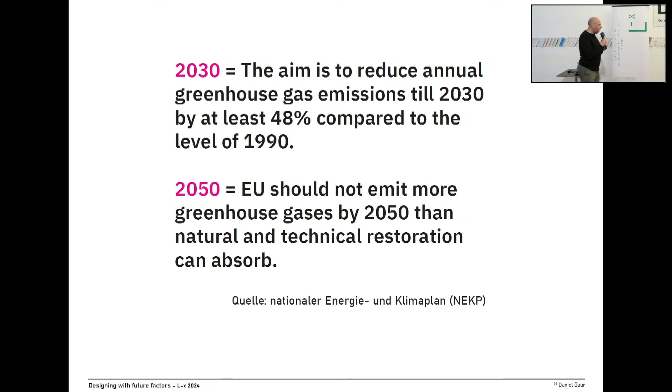And even less do we understand the goal we have for 2050. That's something—when we formulate goals and have no idea what we do, then we definitely should change something. We can change the goals, or we can get on the path to figure out what we really have to do and where there's an impact we can really solve, or adjust the goals.

The first way, I try to figure out what's the cultural background, why we don't understand what we have to do. And I found it in the culture of building. We all love to build, don't we? Yeah, we love it.

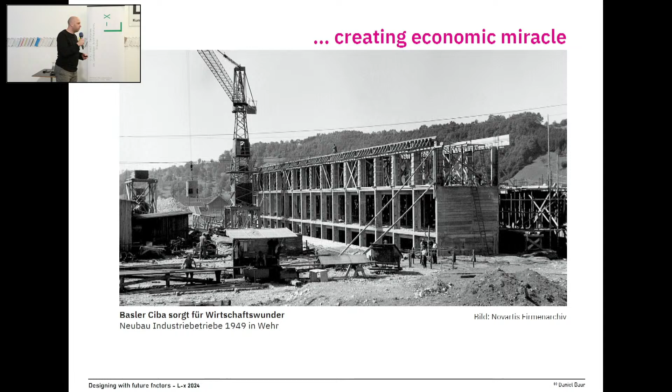The next thing, some years later, after the war our culture had nothing—no money, no food. Then we realized, and this is an image from Basel, the pharma concerns built up industrial sites, and we learned that when we build huge buildings, that generates work, and because we can work there, we can get an economical miracle. We could raise our prosperity. So we learned that building helps us get somewhere.

And this is also happening in Switzerland, not just Vienna. I read in the newspaper in Zug that when we build many housing, we can solve all the issues of people needing apartments. At the end of the article, the journalist said, yeah, probably it's not really equality, but we could solve this problem by building solutions.

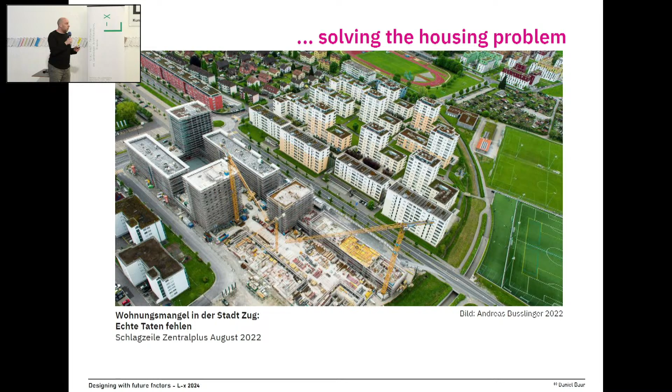This is our culture, this is where we're coming from, and all the universities are built out of this thought. And even more a problem—I guess you have pensions too—because many pensions invest in buildings. So we actually save our prosperity in old age by building buildings.

So we need those. In Switzerland, more than a third of pension money is saved through building, and they have to build every year so they can keep the safety for the old people's money.

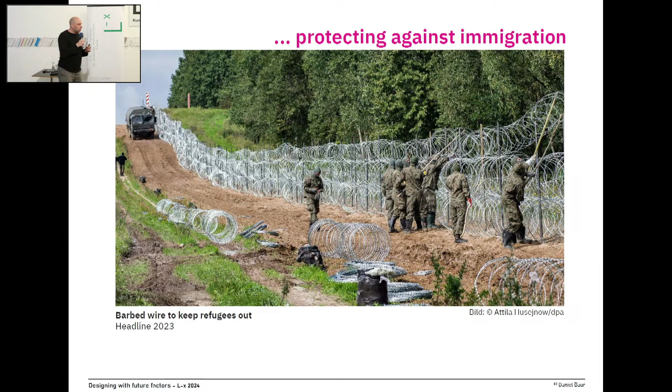And then we learned last year that when you build barbed wires along the borders, you can solve the issue with immigrants. Mr. Trump said this too. You still believe it? It really shows that we have no other solutions, or it's hard for us to find solutions other than to build things.

And brings it somewhere—don't ask me where, to the sea or somewhere. So we've learned that we don't have to change things. We just build this direct air machine, and then everything is good.

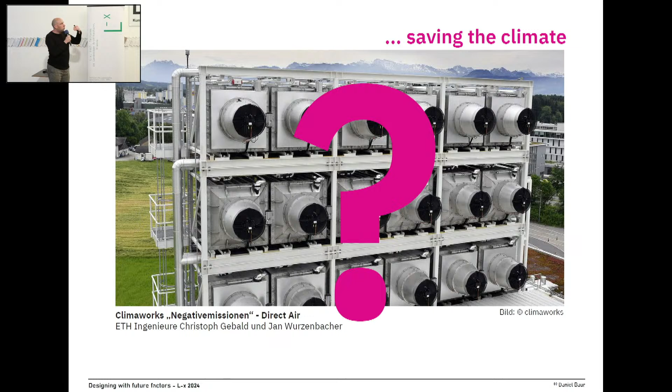We have a cultural problem. We don't have a problem that we don't know how to do it. We have a problem that our way of finding a solution is by building things, and now we learn that building doesn't lead to anything good—it leads to a problem. So we've learned that building causes problems.

And what that means is the big issue. We feel enabled—when we have a problem and we can do things, we feel enabled to react. So what I learned from this is that we need to find solutions for society, not just for building things. We need to see it holistically, not just by designing with a new label where everything looks shabby chic with reuse. I really hate shabby chic, sorry. Shabby chic is not cool.

Because we have a culture of aesthetics. This is part of architecture, this is part of our talents. And I think we need to see the whole process.

And this leads me to the question: what's the challenge? I guess most of you work in an office or are studying architecture or landscape architecture. Sorry, it's going to be dry, really dry, for about two minutes, but it's important to talk about this.

Let me talk about the level of sustainability and how buildings can really be helpful for what we need to do. The lowest level is the method of efficiency, the design methods. I talk about design methods because this is the base of our work. We often forget that we don't just build buildings, we actually design the design process—this is the first thing we do. And what we realize is that many architects and landscape architects are still stuck in the thinking of efficiency and the method of building.

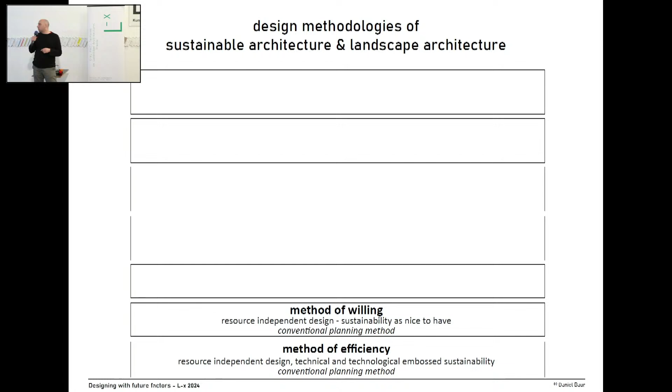The next level is these label things. Who knows all the labels? Who likes labels? You're very welcome. I don't like labels, because labels give us the feeling that what we're doing is good. But if you look at where these labels come from, they're from the industry that's actually doing all this construction. So it's a legitimation of what we are doing. I don't say it's wrong, I just say it's probably not enough.

And now we're in the situation that reuse becomes like modern—we think it's cool to reuse a door, or even worse, a window. It's the worst thing you can reuse, actually, the windows.

It really doesn't make any sense, but I will talk later on about this. When we rise up and say, okay, when we really want to work sustainably in our profession, we need to work in these cycles. This is not that easy, and I will show some projects we did with this thought of circularity.

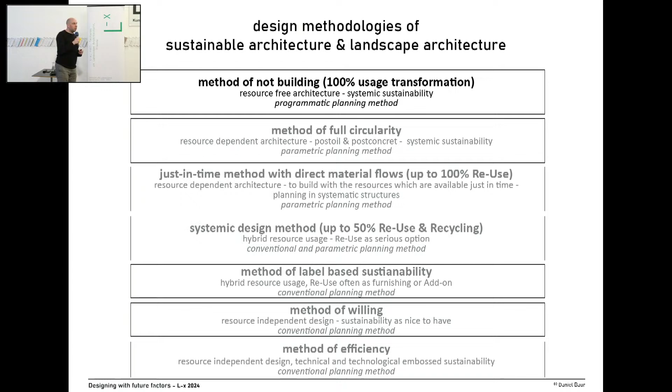The heaven of sustainability is the architecture of non-building, and I have no idea how that should work, because I'm not really a fan to say that we should stop building things. We need the possibility to react to the questions of our society, and that needs the situation that we can change things. So I'm from the side that I think we need design methods that can work in circularity and that we still can do our job in a way that we have a future ability.

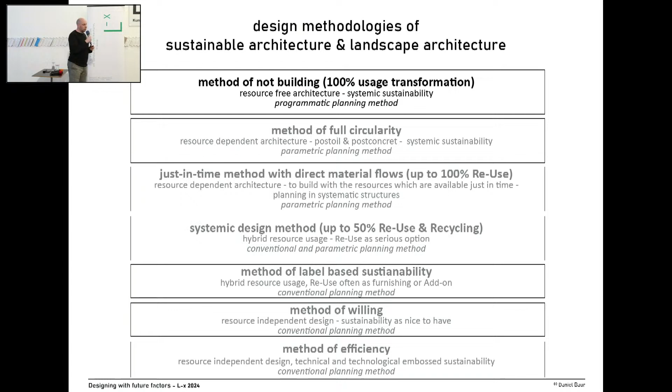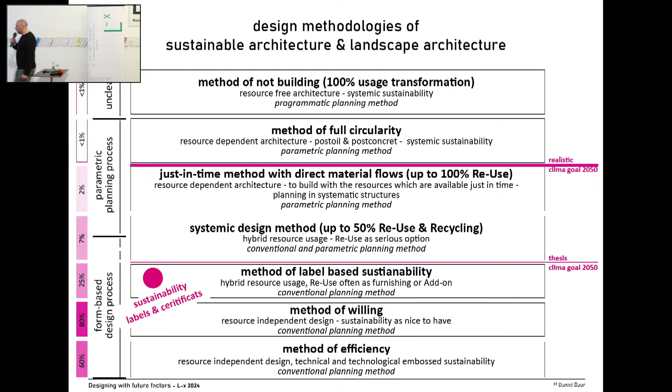From the research-wise, we see that the goals we heard in the beginning, when you do the method of labeling, we're going to be good, we can reach the goals. But the research society says actually we can reach the goals only when we are up there. Interesting is that most of the architects and planning offices are actually here, and that causes the situation that I found. I'm interested in that part, at the university and also at our office, to figure out how we can build in this circularity.

This means resource-based designing. And I bring you now to the project.

You survived the driving, is still okay? You didn't sleep? Not yet.

Okay, you're still okay. So I want to talk about Campus Primeo. Campus Primeo is an energy supplier, and they changed the brand from EBM, which is not that sexy, to Primeo Energie, which is the Primeo. This is the headquarter, you can see. And somehow they asked us to be part of the designing team who brings this industrial site to a headquarter feeling.

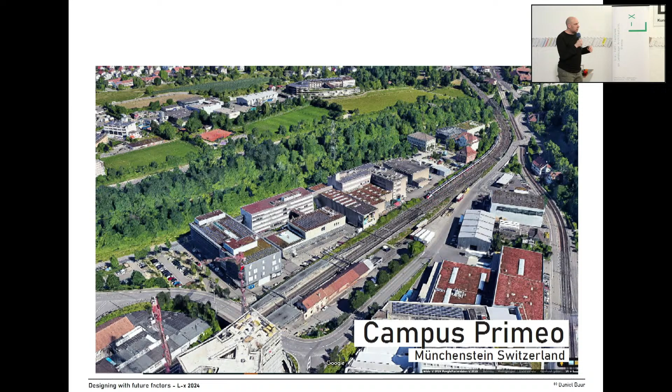The first thing I read is what they wrote about their sustainability. And they found all the great words, really: reuse, recycle, repair, decarbonation. Really, I don't know, probably AI, they spilled out the words they need so everybody thinks they're sustainable. And we as a team said, okay, we're going to do it that way. And they were quite happy, they found this cool.

And a half a year later, there was another feeling, and I will tell you why. This is kind of how this site looked like: a lot of asphalt. We had to support 40 ton trucks going there. It's really an industrial site, so it has to fit the conditions of an industrial site.

The first thing we did, in a meeting when we started the project, we said, look at these, these are the values we follow. We said we want to have a climate positive design. We just work with reused elements, 100% also the foundation. We use material appropriate to their life cycle. This sounds also cool: using material that is available at the moment of construction. Okay, no fun anymore: sponge city principle and waste-free construction site. This is the funniest one.

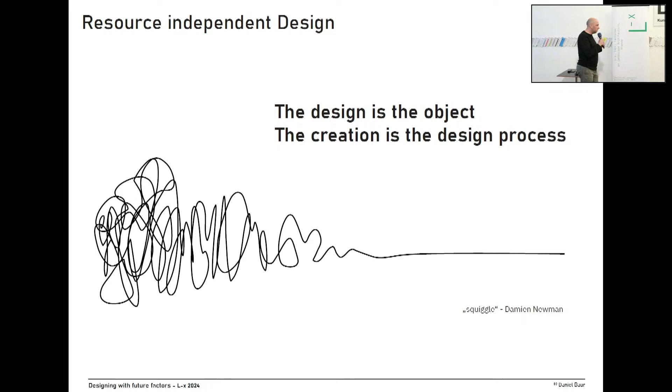So when we design resource independent, the design is the object and the creation is the design process. This is important to understand, because when you design resource dependent, the resource is the limitation of what you can do. So you're actually designing the rules of how the resources come together, because you don't know the resources in the moment where you're planning—you are not designing the objects. So the design becomes the parameters that lead to the objects, not the objects themselves.

Are you still with me? Yeah, good. So the creation is the linked system.

The interesting thing was also, how can you get the permission for this project? How do you think? We go to the permit department and say, probably it's like this—it could be gravel, it could be also slabs, we don't know. The drainage, probably it's a linear drainage, probably it's punctual, we don't know yet. We don't know the material right now, but we need the permission, otherwise we can't get on. All these questions we had to solve while in the process with the departments for permission, to figure out how we can save quality.

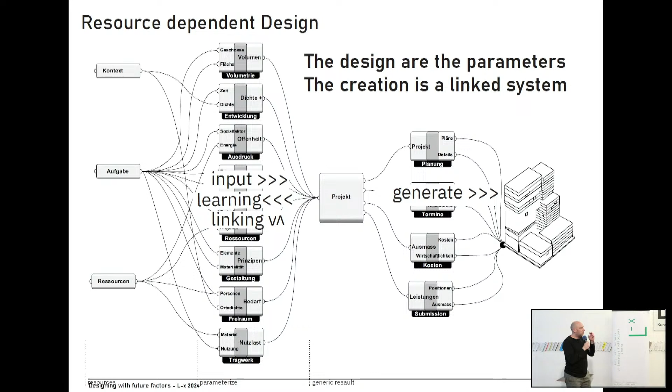This project actually started with the question of how to set up rules. In the beginning, we didn't design the plaza—we designed the rules and simulated it. This was very important for us to understand the aesthetic. It's not just shabby chic, arranged—we created rules that could work with the conditions of unknown things. We didn't know how many stones we had, we didn't know which kind of stones, so we set up rules. I can show you this on this plan.

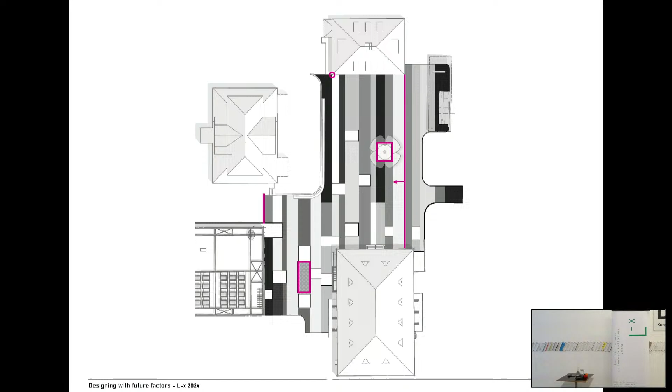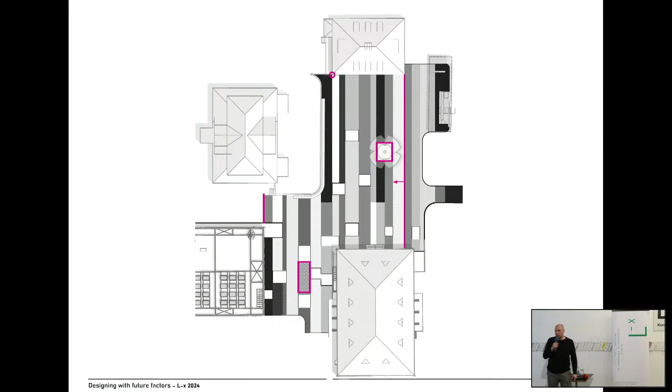This was the little plaza, and we decided that one rule is that we think in linear lines. Why do we think in lines? Because it was helpful, an easier way to figure things out if you have just one dimension to go with different types of materials and amounts of material. We said we always want to use everything—when we get 200 square meters of stones, we take 200 square meters, we don't take 150 just to fit our design. We take everything, otherwise we have waste again. So we said: no waste on construction.

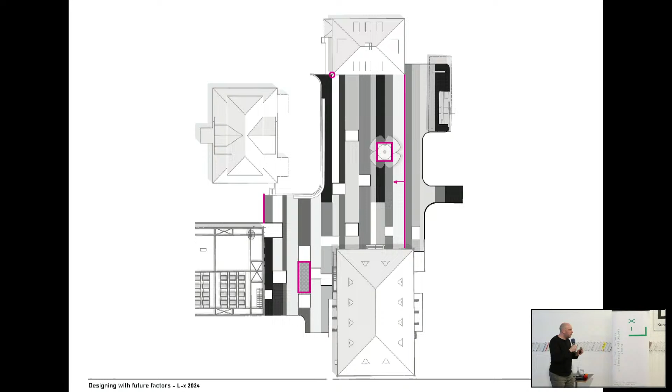So we had to figure out which parameters are fixed and which parameters can grow. We defined how it grows, and also with the trees—what we're doing when material fits to each other—so the trees become like an in-between situation, a buffer.

So we started to design things, and this was also interesting with the construction company, because when they started we said, we start with these rules and we have to work together, because in the end the plan looks totally different. So the first material came, and our construction manager was quite screwed up, because he had to work totally differently. Usually you plan and you're controlling, you're a manager. But when you work with resource-based design, this is teamwork.

What we learned is that it's a great experience to work with these people from construction on the same eye level, because when they had to find gravel for the foundation, they walked through the area, looked at other construction sites and their dumpers, and said, this dumper comes to my construction. They had to go there and look at the material together with the foreman and the construction manager to find where's the right material. This creates a totally different symbiosis of working, so the designers and the construction become one. And the quality was great.

Because the people from the construction side, they wanted to show that they can do it well. And we were not anymore the controllers, we were the team partners. This was a really nice experience.

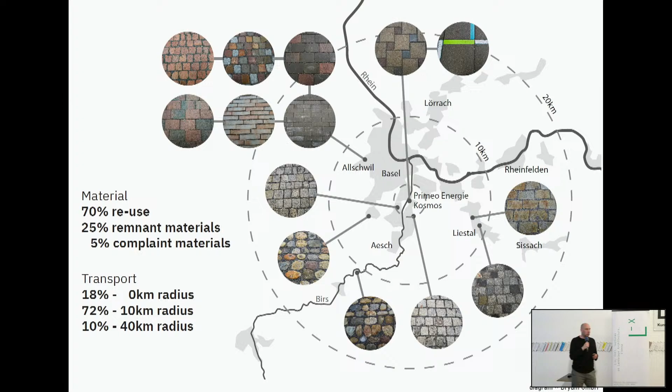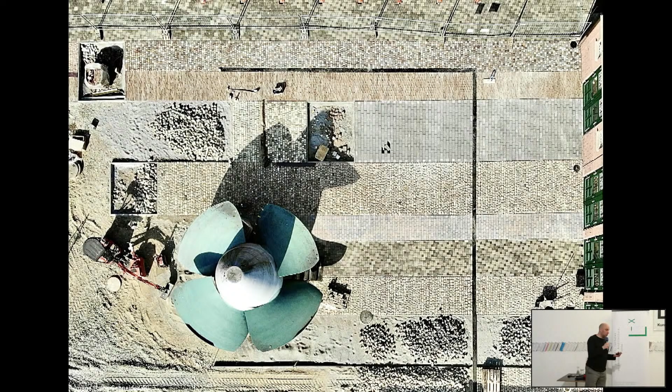So I'm going to show you the images, and I think it's important to talk later about whether this is good quality or aesthetically pleasing, or just a bunch of material put together. I think this is an important discussion.

You can see here the rules - it's done really by line, and always with no waste. And also, the trees are not reused.

Actually, this was also funny. This was an old parking lot.

It was also funny to see that the construction managers, who are usually not the designers, came to a high level of performance by designing, because they found - this is, and now I'm also part of the design process, and it's really this way. You become part of the design process on construction. I think this is an interesting thought, also for people who really want to be involved in the whole process.

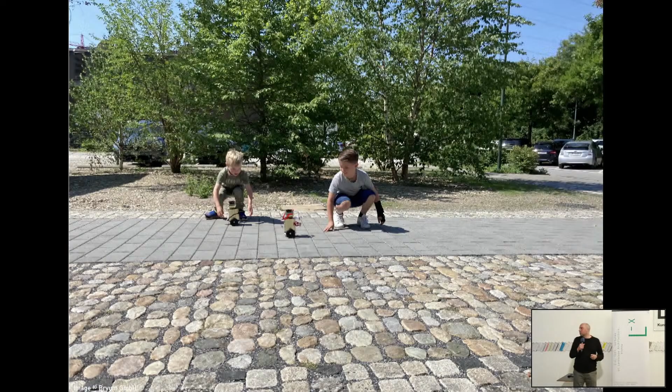And what's also funny is that this plaza becomes very lively, because even though the site is huge, the scale becomes lively because people like to be there. It's a slow scale, and the materials are different. Somehow they really liked it.

I think today I wouldn't do it the same way, but it was the first construction we did this way. I'm glad to talk later about this, because the mixture is probably too much. Somehow people like it, but we have to go further.

So when we published this, everybody was saying, on landscape it's easy, it's 2D, landscape is flat. And because I'm split between teaching architecture and having a landscape architecture office, I said we need to invent this also for architecture, and figure out how this process also works for architecture.

I want to show how we do it, and some results about reuse in architecture. So it all began with this concern in Basel who wanted to demolish a huge amount of buildings. They studied whether they could reuse or transform it, and figured out it's somehow about the structural system - it's not possible with the existing construction and structure. I was part of the discussion, and I said that's perfect to figure out how we can bring these buildings back to circularity.

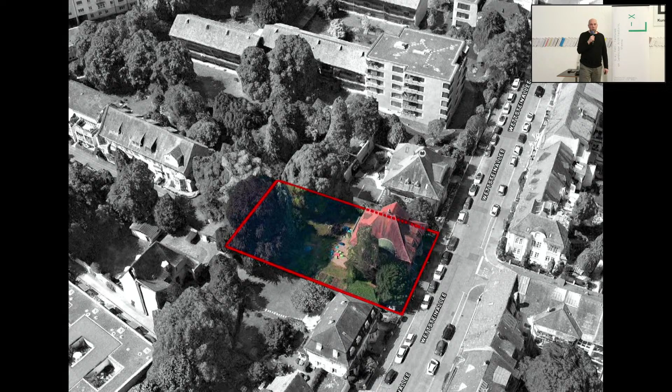And we started by looking for different ideas where we could intervene in the neighborhood. We found some partners who were interested that we could test this with students. And we came up with a thesis.

In the beginning, they came up and said, we're doing a catalog with everything - the floors, the doors - and you can go shopping like it's a mall. And we said, forget it - when you want to get rid of this building, you'd need years to bring everything back to circularity. So as a university, we said you need to create construction sets out of it - not just individual pieces, but create, out of these buildings, 7 kindergartens and housing units, where people take the whole house or the whole kindergarten. Otherwise, you can't solve this problem with such huge buildings.

Roche said they are totally with us and they want to check this, and then we set up rules. And I think these are very important rules when you work in a resource-dependent designing process.

The first thing is that when you use material, you should use it in the same function again. That's the best way you can use it. The second thing is that you shouldn't adapt things, so no waste. We don't want to cut things. If you have a steel bar, use it as it is. The only thing you can do is a structural addition when you need a flange to bring it together.

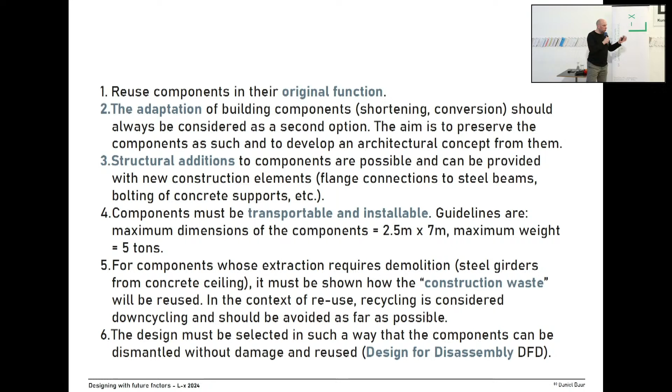So the organization that you need for a research designing studio like this requires a lot of people. We had this great situation, and I can really say, I think every university should work more with private people.

So we found engineers, they were part of our studio. They came, they did coachings, they brought their knowledge. We had companies like Erne, people who actually do things like demolition. And with this huge team, we could do research and education at the same time. This was really helpful, and we still do it that way.

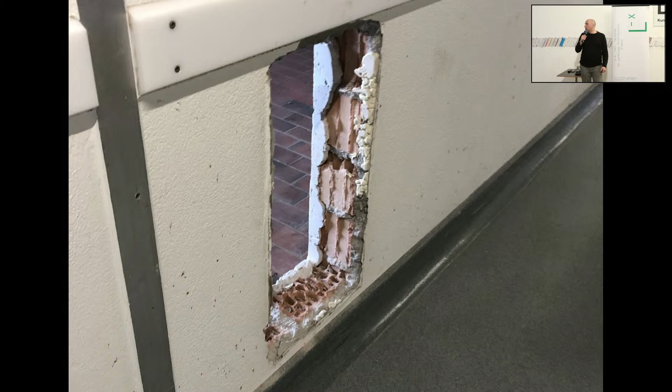And the resource, we were there with the students, and we looked at all the buildings, and all the material, and all the layers of a building, and of course also the architecture.

Because often when I hear about reuse, I don't feel that people really think also about the design and the aesthetics. They just talk about bricolage. And this is not really what futurability means with reuse.

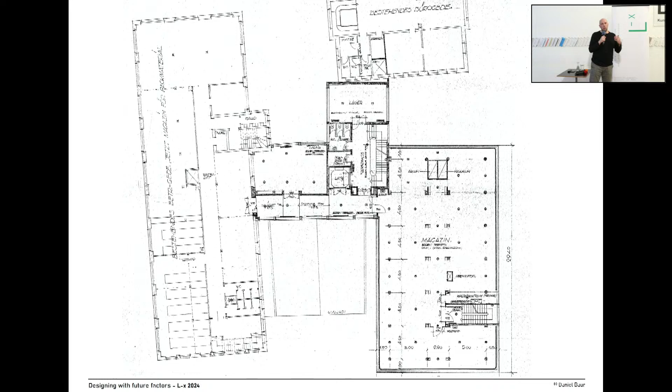So the students really get into the building, try to understand why things are the way they are, and what's the future of the elements. And Roche, they were already at the stage that they had a catalog with all the elements, and this is easy.

And our research team, they said, you know, often we don't have this catalog already. And we found a way, I just want to tell you this, that you can also use Matterport. You know this Matterport? No? This is an easy way how you can create your own street view for a building, for example.

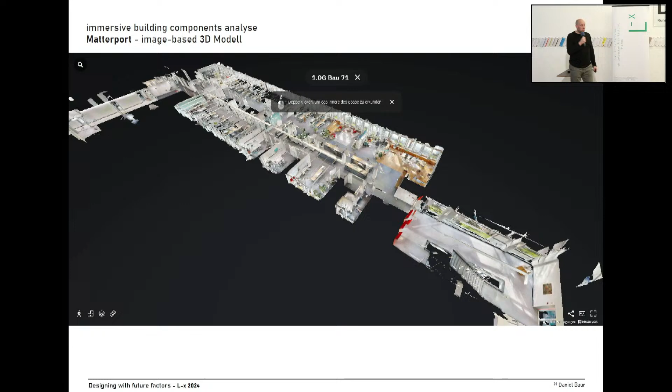So to scan this building, two students took an afternoon. They walked through this building with a camera, and this camera is so precise that it captures the whole thing by image in 3D. And the cool thing is, it's really stupidly easy. Even I can do it.

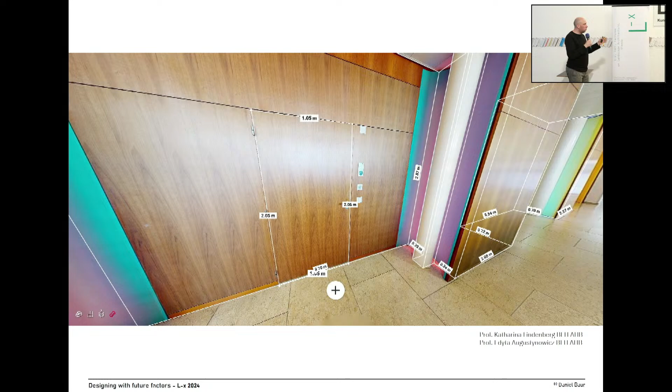So that you can measure it afterward on the internet. You put these 3D models online and you can go and measure things. So you don't have to create a catalog in the beginning. You really can just take it from the visual situation, and then you can see it's very precise - it's 1 meter 05 - and you can measure. Everybody can measure later on what the elements are, and this is important.

Then, when we talk about design method, it's all about learning. Resource-based designing is all about learning. So two-thirds of the process, you don't work on a project, you don't work on what you want to see in the end. You're learning. And in the beginning you learn about the elements, which kind of elements you have, and what phenomena you can create out of these elements.

We talk about the structure, possibility, and the programming, because structure and programming is also connected. This is in landscape as well, in the architecture that way. And then on the end, you talk about the solids. How can you feel solids? And this is on the end a system that comes together.

And in the last third time, you're generating actually your project out of the parameters. So the designing is actually really in this phase and not in the generating phase.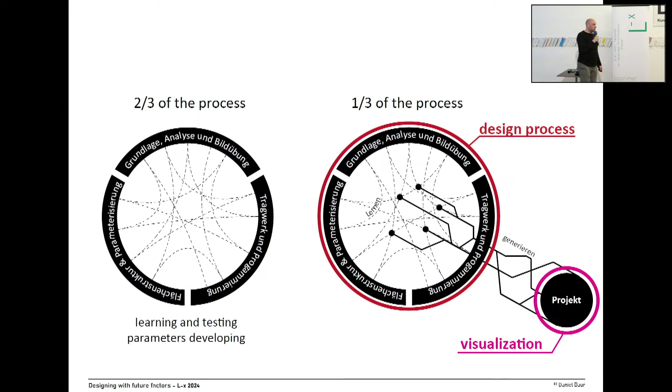So in the first thing, as I said, we designed with the students' parameters and created out of these parameters spaces. We checked out the aesthetics of the quality of spaces. We checked out the room program, can they fit in? In the second phase, we checked how these solids fit to this structure, and we had to learn also that some structures had to be changed.

So this is a very iterative process. It's not really - if you have already in phase 1 an idea of the final building, you're screwed up with the second phase. So you have to be very iterative and to learn things. And this is something students in the beginning struggled with, because they want to create a product and not to create a learning curve.

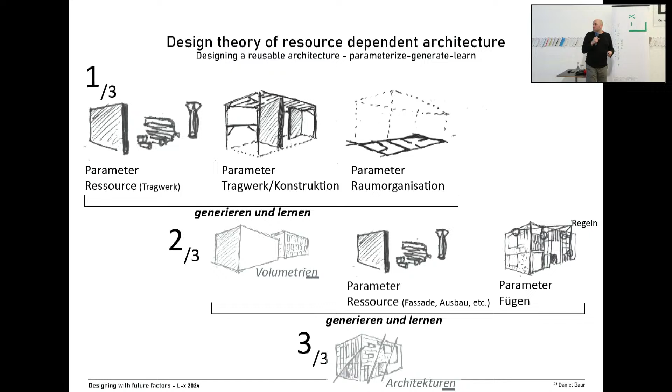I want to show you, before I go back to landscape, some projects to show also that this has nothing to do with shabby chic. The project from Rebecca Bernhardt, I show really the process. We gave them the task that in the beginning they should create, out of images they took, an atmospheric translation to the work they have to do, to the project what they have to do. So it was an industrial site, and they had to invent 2-story buildings for living.

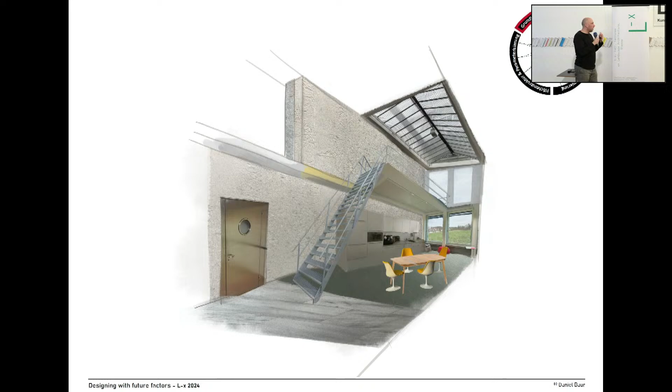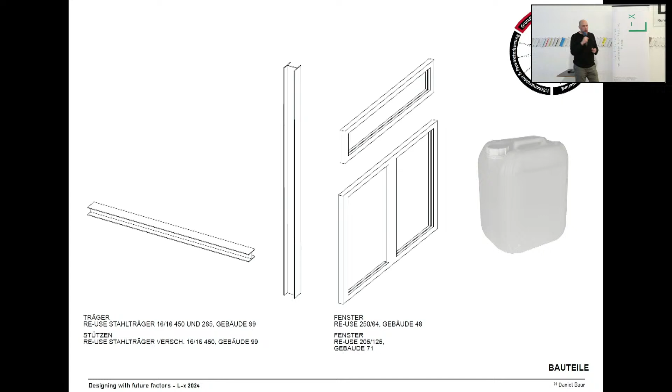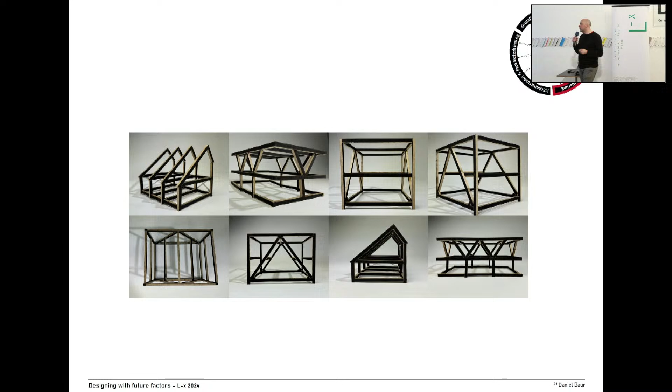So she started to figure out what's the atmosphere of the material. The first thing was not a technical question. It was really how can we get design, how we get atmospheric with this material. This is very important. The second thing she started to learn was that she decided which kind of material she would want to use for structure, and she started with this material, and she did learnings. She looked at when you fit these elements together, what kind of different spaces you can generate, and what are the aesthetics and the quality of these spaces.

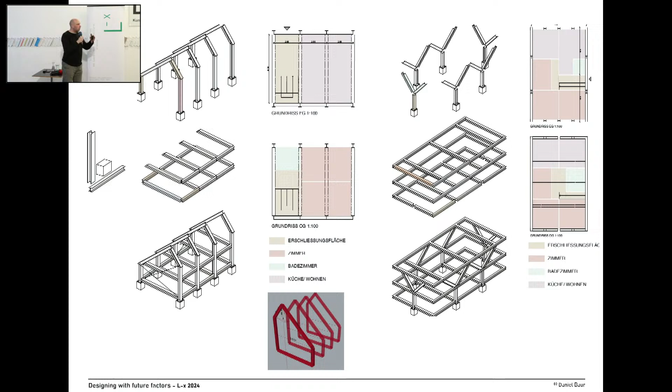Then she set up rules. She figured out which kind of structure gives her the space to react later on, and she created a huge learning curve and figured out on the end what kind of structure would be resistant. And then she started to figure out which kind of solid with its dimensions could work with it, and the whole process was really just learning.

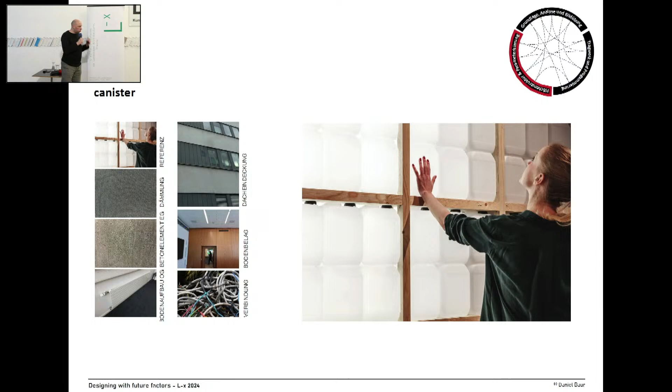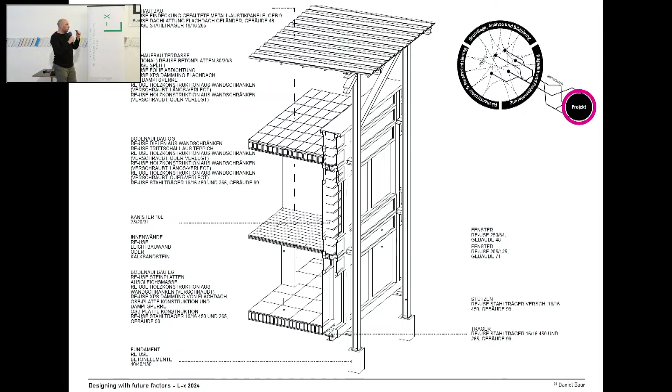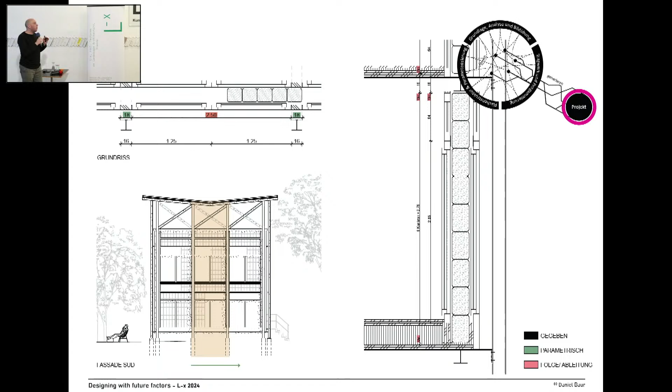With canisters, with pet grids, she did many different things. And on the end, she generated a building out of it, which works exactly with the beams they had in the right length, with the window dimensions. And as you can see, the whole design is based on the resource she had. And I was quite happy to see this, because out of the design process there were really interesting phenomena of space she would never have had if she would just design by herself.

What was also interesting, the engineers, the external experts, they counted what this means. Usually, as I said, I'm not that much interested in numbers, but it was interesting. They really checked the project from Rebecca in a way - is it really working structural-wise? Is it engineering working? It's not just a student idea of working.

And how much carbon dioxide it's expended by square meter Energiebezugsfläche per year. And you can see, if she would do this project with new elements, it's around 16.18 kilograms carbon dioxide. And because she worked with reuse, it's almost a third of that. And when we think back to the question in the beginning, what does this mean for 2030 - half of the emissions from 1990 - then we get some solution that when we change the design process, we are able to reach these goals.

This was something we really learned, that we need to change not what we are building, we need to change the way how we design it.

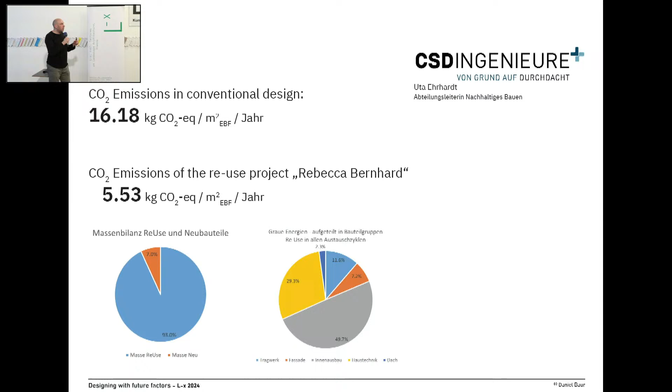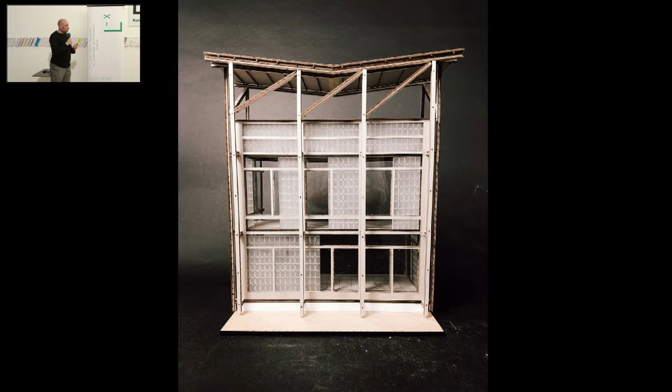I really like this project because it shows architecture, it's not just bricolage. I'll flip through other projects without explaining too much, just to show that changing design projects brings back architecture quality, aesthetic quality, and not just a new sustainable object.

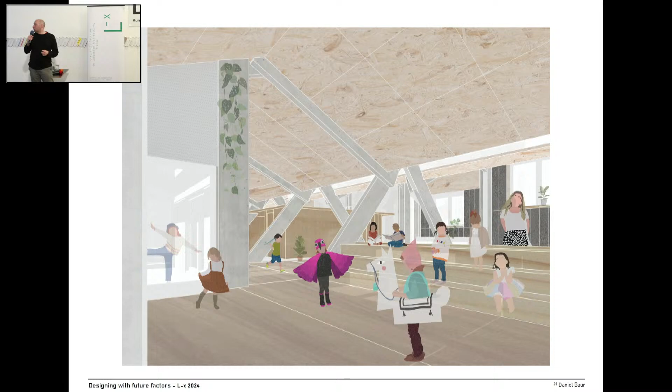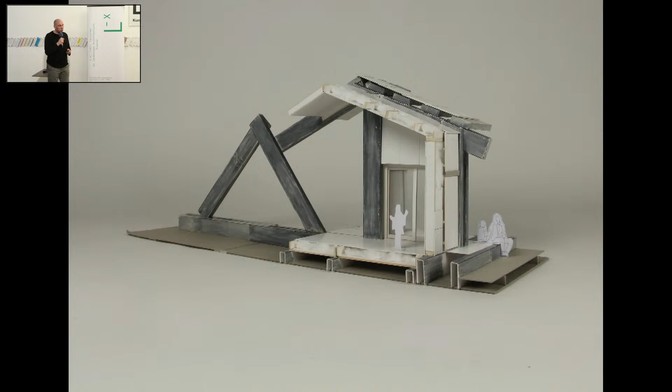She actually worked with construction of concrete, using concrete situations because in Switzerland 70% of built buildings are concrete, so we need solutions for concrete. She found structural solutions for how to use these beams, and had to design a kindergarten. The space became very interesting for kids, especially at their eye level. This resource-based design led her to a very special way of activating or creating space for kids, and it worked 100% with reused material.

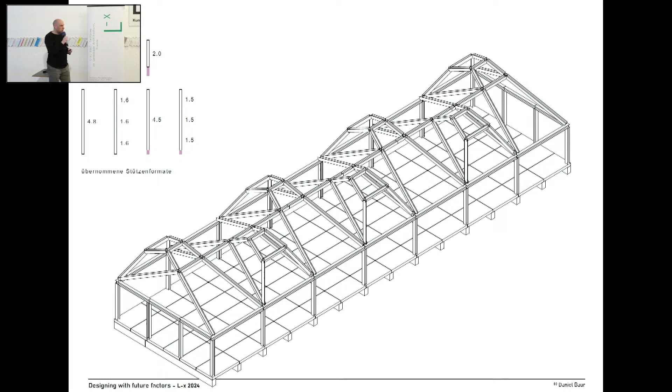Celio also had to design a kindergarten, and he tried to figure out good structural rules. He found a difficult one, but it worked without changing the elements, creating a two-story kindergarten which I really like. The kindergarten professionals at our last review loved these designs because they felt it had a really nice atmosphere.

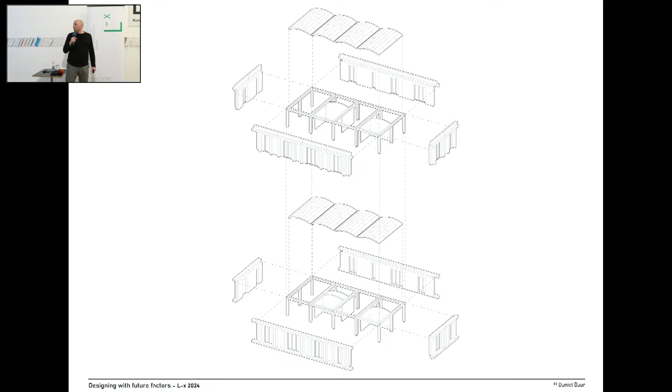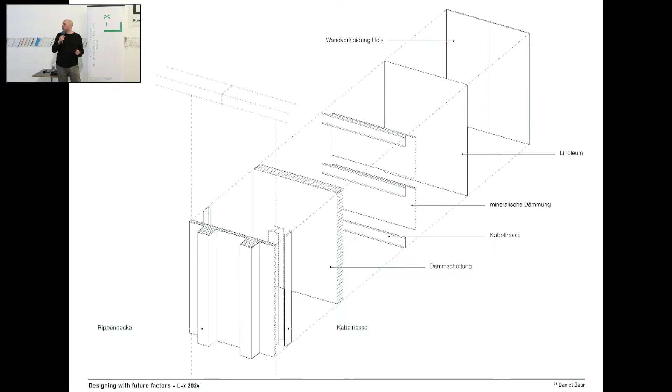The last project was very technical. He used slabs and ceilings to create a whole building out of concrete, 100% reused, including insulation and wind paper, everything 100% reuse. This project fits very well to the situation it needs to be placed in, and it's a house for living.

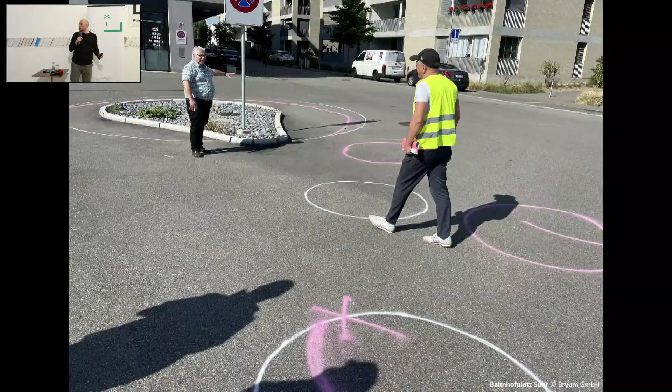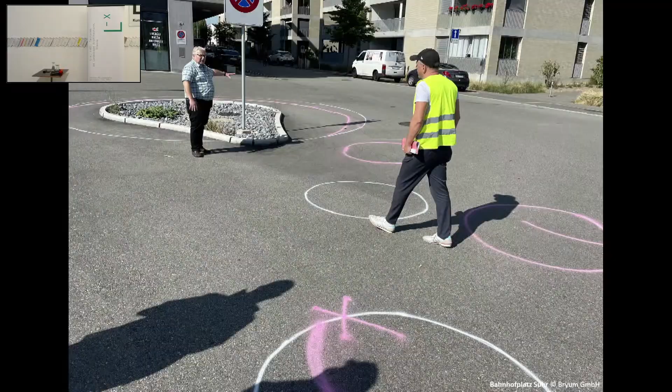It's somehow, that was not me. Somebody wants to go to... I'll just go back. Are you done? You want to go to Apero, I guess, huh? No, okay, so next project.

It's a landscape project. At the beginning everybody said it was interesting, this plaza is small, almost an art piece. We have a contract with the city of Bern to build a new city access, quite a long and important one. We proposed doing it 100% reuse, and it's important this access has quality because many people will use it. There are many functions: firefighters, police, tons of people, bikes, and it needs to be barrier-free. So it's quite a huge amount of things we need to solve.

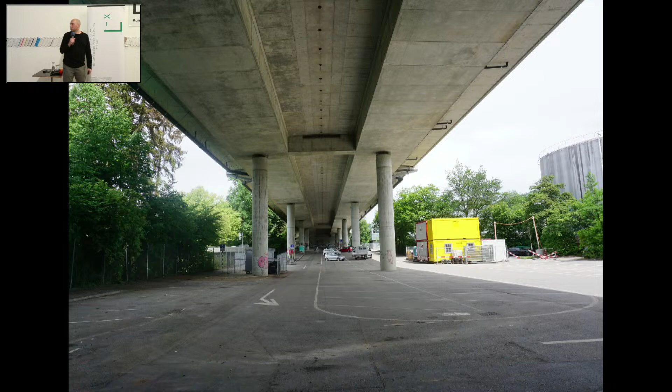This is the space as it looks today, basically a street and parking lot. The master planning says the left and right sides of this bridge will become a huge amount of housing, more than a thousand apartments. It's a huge dimension of development, and this axis underneath the bridge becomes the new city axis of Bern. So that's the vision.

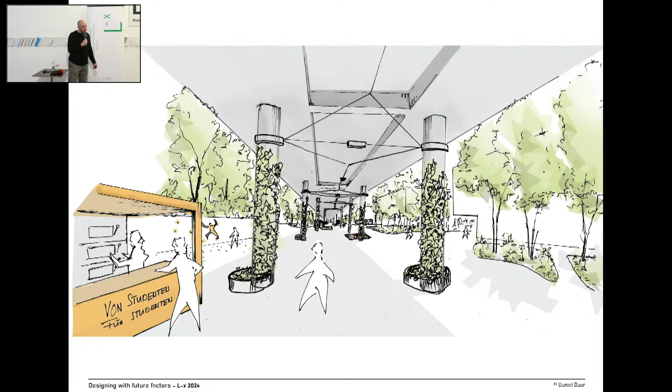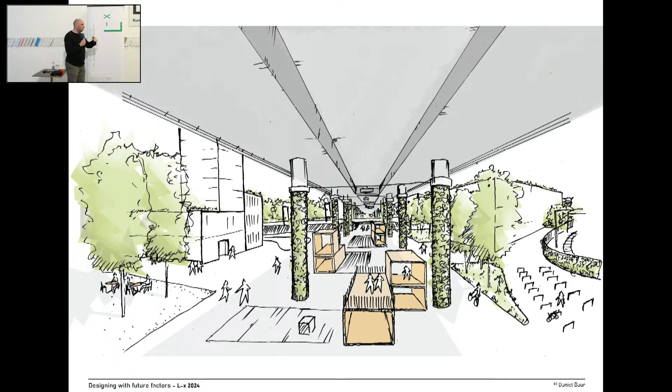In the early beginning we came up with a design for it, and said it needs an identity, it needs branding, because this space underneath a bridge is quite heavy. It's not just cool, it's also dark and cold, so it's not really nice.

Interestingly, by accident, we won a competition right next to this axis about open space, and this building is a public swimming pool that has to be demolished. We said we want to build our landscape out of this building, since it's right next to the axis. The city of Bern initially said this is a cool, progressive idea—they had no idea what they were doing. Me neither. So, some images of the building.

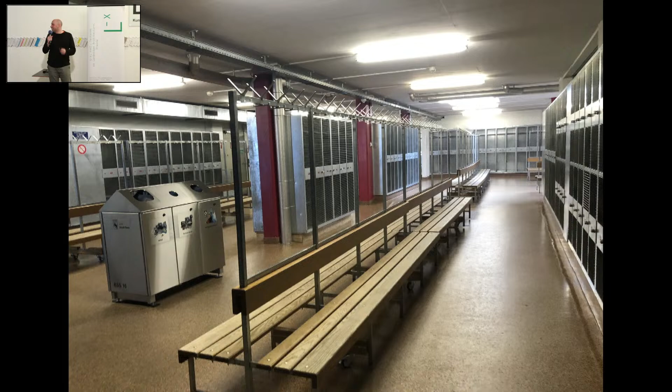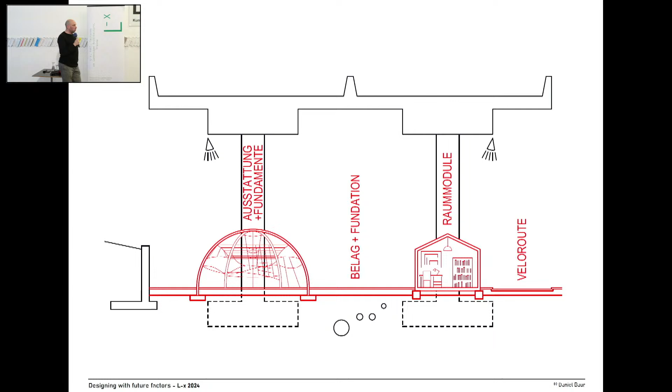We figured out, while testing things in this phase, that we can really do all the landscape out of this material. We need some extra because it's a huge landscape, but we can use a huge amount of it.

What we learned in this process is that we need to define a new permission process, and we need to find a way to communicate quality, because we don't know yet how it looks in the end. Of course the city of Bern council wants to say yes to a project, and they want a rendering.

When we come and say it could be this way or that way, they're afraid this is politically risky. What we learned is we need to work with images, so we visualize different possibilities. For that, I don't know, do you know Grasshopper?

This is a huge help in this moment, because there you can parameterize the design, and this helps a lot for the designing process. You can change it very easily, and we believe that in the future we connect the whole construction documents to the design process of the parameters.

So this is one process. It's not anymore designing for project, SD, DD, and construction documents separately. It's going to be one thing, this learning circle, and in the end you're building by click. We are not there yet, but we are coming close.

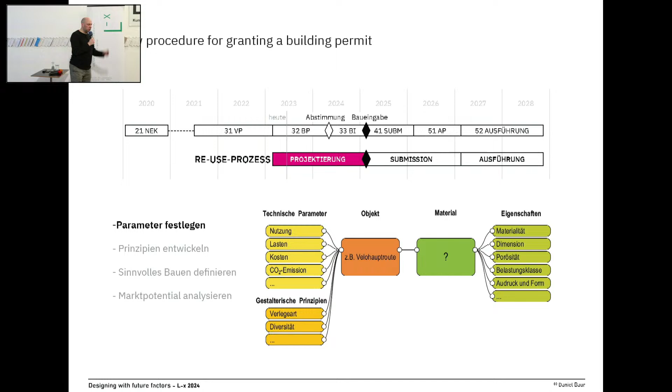The other thing is that when you work with the authority, we have an issue with submission, because there are some millions in costs for this building, for the landscape, and somehow you have the rules of submission. How can you submit something you don't know? You basically can ask for labor, but you don't know the price in the end. This is a process we are still in.

I don't want to show that there are too many problems. I want to say that we have to change the way how we design, and we have to change the process of how we get from the idea to the built situation. These are the two things we need to change, and that needs many young people and old people. They try to really get into these topics and figure out their own way. And what is cool right now, the climate in society is open. We have really open doors to change things.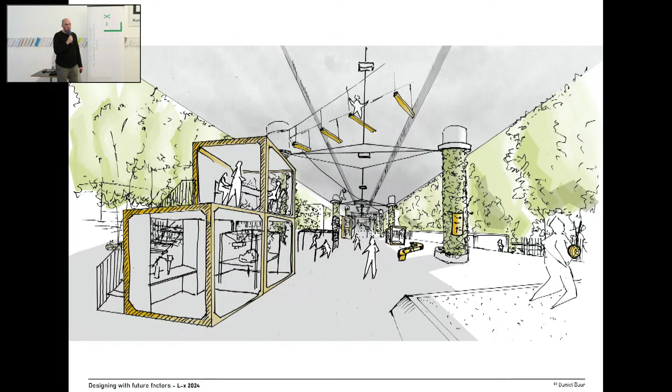Okay, now we go beyond. And this is more for this discussion also. Reuse soil. Who has knowledge about soil?

Hey, great, it's good. Soil is very important. When we talk about climate, the soil is the buffer, it's almost the most important element to solve our climate issues and future ability in the space, because soil can do a lot. And we have a contract where we create a situation where they had buildings, a park.

That means you tear down the construction situation and then somehow you need to get soil from somewhere. So that means you have to destroy cultural landscape or agricultural landscape so that we can build, and it's not a little, it's around 70,000 square meter park, that we need to destroy landscape for so we can build up a park. And this is a no-go for us.

So we came up and said, we want to figure out how we can transform the buildings into soil. What's the issue? Is that a good idea? No? Why not?

I think so. There is a lot of plastics and chemicals in buildings, and also there's no easy way. It takes years to build up soil, life, and the right chemical composition.

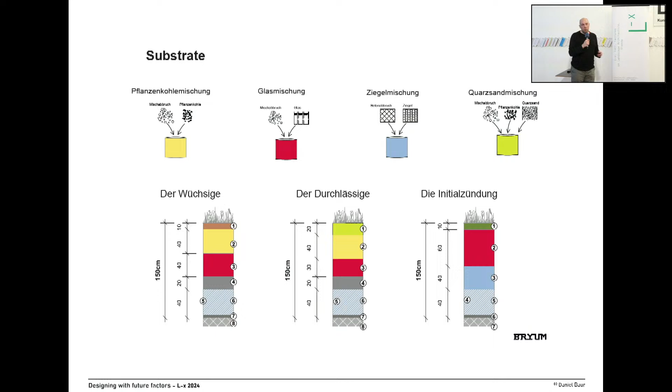And we came up—we looked at which kind of substrate we need for this soil, and how we can figure this out, find this in the buildings. And we convinced the developer that we do the research, and this is a good story, and it's not just a good story, it could also be a pilot for the future, because soil is not growing, as you said, it takes a long time to get together. So it's an irreversible source, and if we find a way to create soil, this is a good thing.

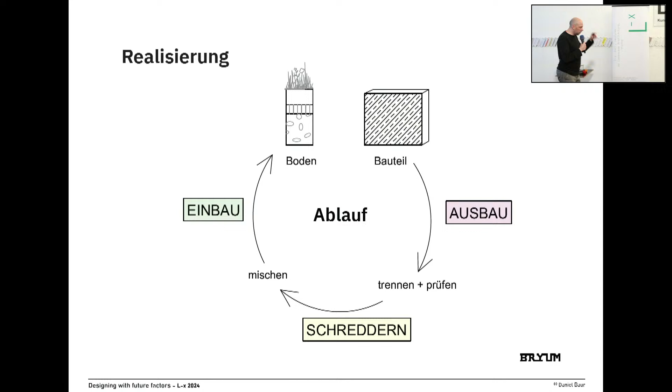We said we're going to take the material out of the building, and we create the soil, and we design the process of how we get the material to the size and structure we need for soil, and then we test it. So the first thing is we took it out. As we said, we really looked at the material—is it dirty?

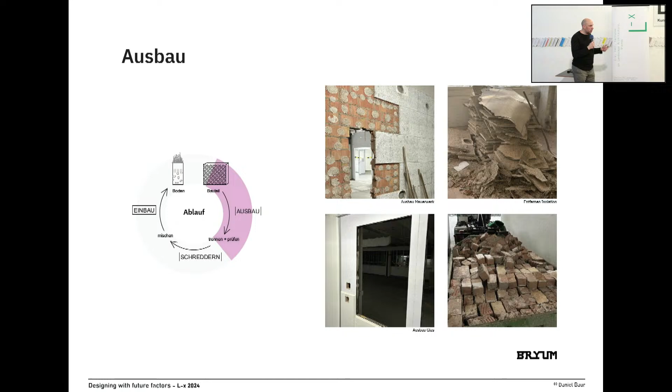Is it similar? Does it work? We took glass, we took bricks, we took wood, and of course we have to manipulate it to the grain we want, to the curve we need for a good soil. We worked together with two universities, ETH and OST, and our office, and created three types of soil out of these buildings.

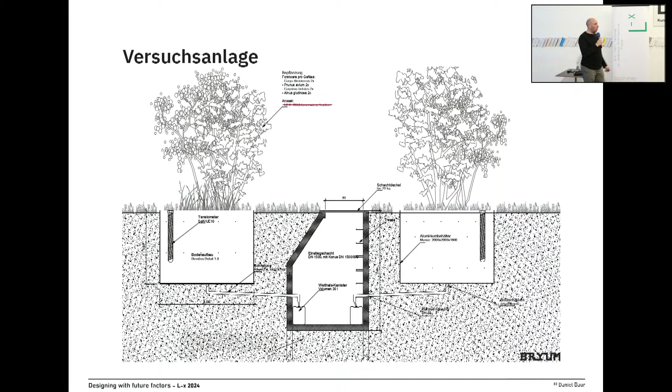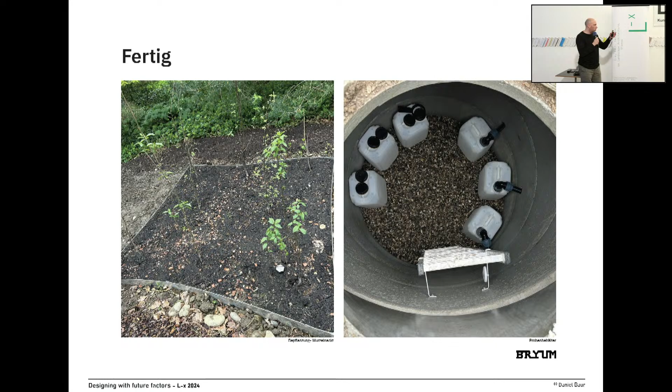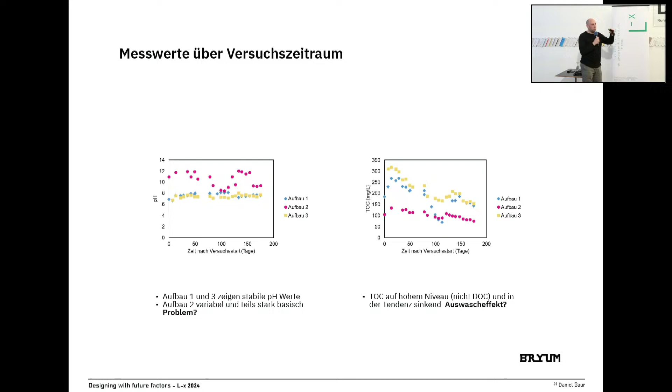Since more than half a year, we have this Versuchsanlage, this lab, in use as a pilot. We have plants there, and 100% of what you can see here is from this building. We created coal out of wood and used this coal to activate the soil. We also measured all the chemicals, because we know there are chemicals in it, and checked it against all the norms to see how we can use it. We were quite happy to see that the plants grow well, the structure works, and we are processing this. It shows that it's really a possibility.

But now we have a huge issue. What's the issue? Don't forget, we work with waste. We've fought for years so that no waste gets mixed up anymore. We're all recycling kids, aren't we? PET to PET, plastic to plastic. We all learned this. And the whole legal situation says you cannot mix any waste material anymore.

Now, this is a huge bundle of waste mix. The authority said, good idea, but don't do it. Please don't do it. We said, you know why it works, and we see that we can reach the goals. They said, the idea we totally understand, but it's a different culture. We come from a different culture, and we learn that we want to change things. That's really a hard cultural break.

This needs a lot of change also in our planning. We need to start piloting things. We need to do research in our designing process. In our office, we have quite a lot of projects now where, beside the regular project, we start with a little research. I think it's important for future design and future ability that we are researching in our work. Everybody needs to research to figure out the new factors for our future ability.

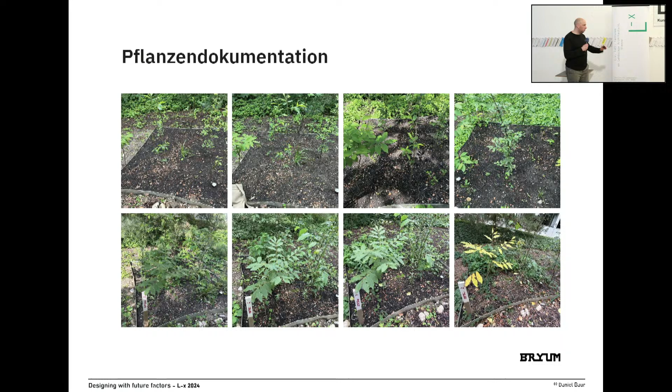You still with me? Okay, no beer? No, okay. Soon, okay, soon. It's beer soon.

Let me come to two points I think we need to change in our process. The first thing is competition. Can you do a reuse, a resource-based competition? What do you want to judge in the end, a funny parametric grasshopper tool? Usually we judge images, we don't judge functions. I'm in a commission where we analyze the sustainability of competitions, buildings, and landscapes. I want to take you into this issue and also give you some solutions. How could we solve the question of competition in a sustainable context?

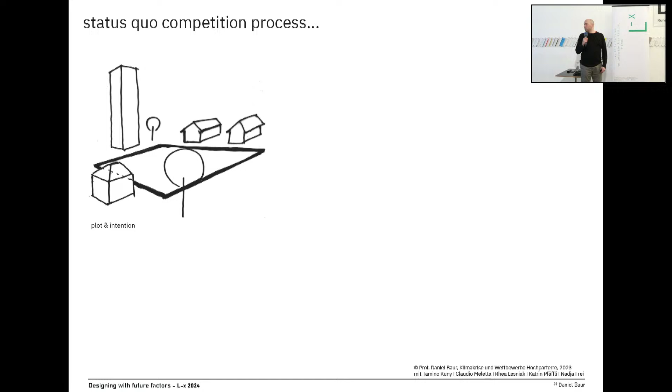Usually you have a plot where you want to develop a building or landscape, and then the framework comes with it, saying I want to build a building with three stories or whatever, so the rules and the goals. Now, when you see the specs of the competitions, you see tons of good-sounding sentences for sustainability: biodiversity, something like facade green stuff, all these quick wins, I call them quick wins. So this is the base, and then in a jury you have this meeting for the specs, and something funny happens: the huge idea of sustainability comes down to a sentence like, build up some ecological hedges, 20 square meters. You know, on a competition, at the end you have to fill out Trockenrasen and a little bit of something for Eidaxli, and everything is good, innovation, okay.

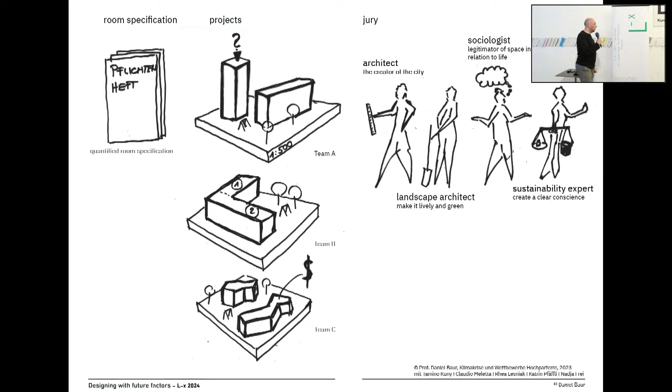Then the teams start to work, and then you realize as a jury, in the research and analysis of the results, that the sustainability of the projects is always similar. The difference is so small. Even when the competition title is 'Sustainable Kindergarten,' in the end it's the same. Every project has the same quality of sustainability. The thing is, in this moment when we translate the whole question of sustainability into some sentence like 20 square meters of hedges, we kill the innovation.

I always say when you do this, it's like bringing the whole question of sustainability down to Dr. Oetker's Backmischung. Do you know Dr. Oetker? It's great, you can cook it every time and it tastes the same. So what we're doing, we don't say 'I just want to smell chocolate.' No, in these programs, in these specs, we say 'use this chocolate, and 20 square meters of it,' and then it's good. This is the killing of innovation. We should stop doing our specs like this.

The innovation of sustainable development is the thinking of designing in a holistic way. As I said, we need to change the designing process, and we don't have to change the design, the objects. We need to change the designing process.

In competitions, this is a huge topic, and we really found a way, also with the SIA, that we can found programs that we can go on and process. What we say is, we are just telling the profile and their requirements. We don't say how they should do it. We don't say 'give us 20 apartments with 80 square meters.' We tell them how people should live in this apartment, in this flat. We don't say the quality, and we don't say the quantity, we just say what the narrative is. And then the second thing we give is how much carbon dioxide they can use to construct a building per person. So we say the person, the carbon dioxide, and the narrative.

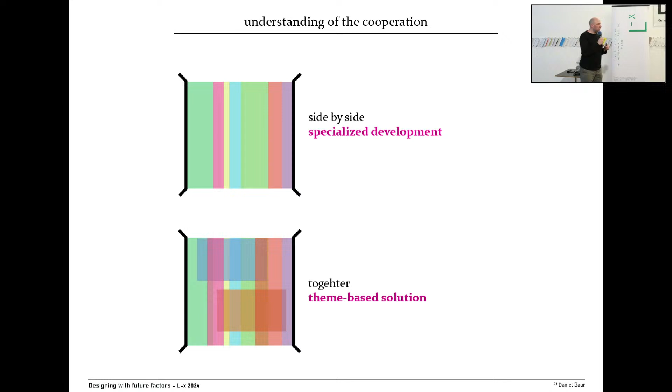Now we are in a situation where this is not working anymore side by side. We have to overlay things, we have to verhandeln - we have to negotiate solutions. And that needs the knowledge of the specialist, not the norm-based specialist.

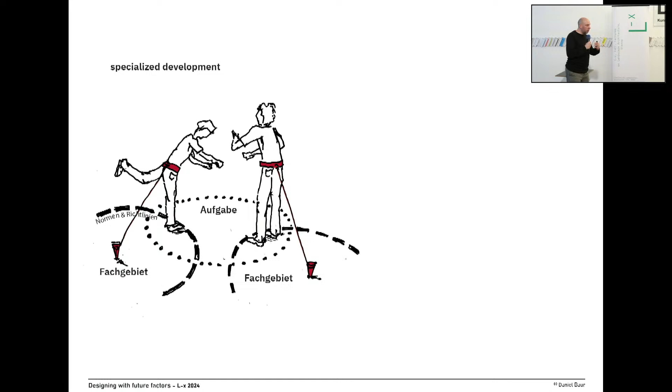I have some images I want to share with you. This is how I learn right now - we try to find solutions. Every specialist is trying to help reach a goal, but he's still bound to his norms, standards, and he has no way to come and figure out a solution together. I think we should go in this way, that we formulate not separate goals, but project goals.

We have a little project in Bahnhofsplatz, train station plaza, and in the beginning they asked a traffic engineer to lay out the plan. And I can tell you, it was all asphalt. Because of the buses, they said there's no chance there could be a tree on it.

And then, of course, it became a heat island, and the authority said it's not okay. They said, you need to work together, and they mixed us together. In the beginning, the traffic engineer said, you know, I can show you the Schleppkurve, there's no way to design this. And we started to change this.

We said, okay, let's ask for a bus driver, the worst one, the one with some notches on the bus. We asked for them, and then we painted some trees on the floor and let them drive. In the end, we actually planted over 20 trees on this plaza.

And the traffic engineer came to us and told me, you know, this has nothing to do with good traffic engineering. And I said, why? And he said, you know, no norms anymore. I said, but the buses can turn. I'm sorry that they don't fit to the Schleppkurve. And I think this is the difference: when we think in Schleppkurven, we can't find a solution. We should actually think of a project as an issue, a topic we need to solve.